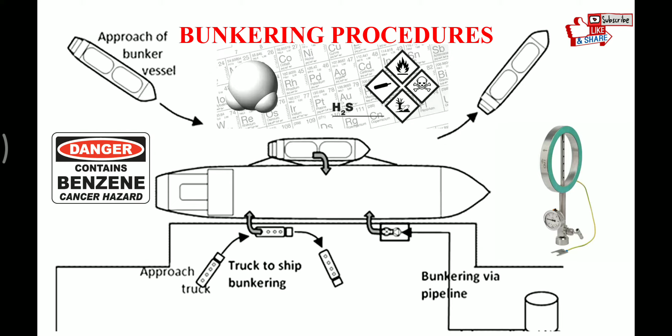So friends, in this video we'll see the procedures that we use for doing bunkering on board ship. So let's begin with this video.

So safe bunkering is a responsibility of the chief engineer, but the accountability still lies with the vessel's command, that is with the master. The fourth engineer shall receive bunkers under the direction of the chief engineer, or the chief engineer may assign a competent person to the fourth engineer to assist him. An engineer officer is required on deck, preferably at the manifold at all times, so that he can take immediate and effective action as necessary.

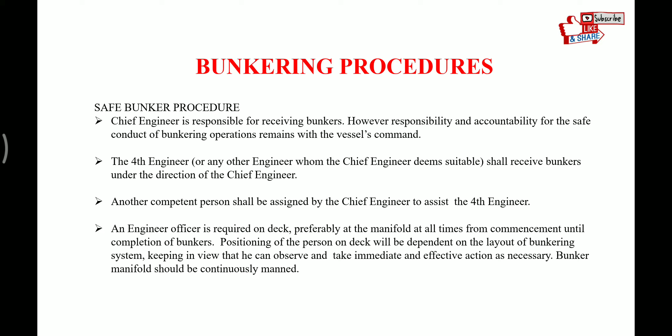The bunker manifold should be continuously manned at all times during the bunkering operation. The duty officer must check mooring conditions periodically and also maintain the watch on deck during bunkering operations. All vessels should have on board a drip sampler for drawing MARPOL samples.

All persons involved in bunkering operations should be briefed on bunkering duties at the pre-bunker meeting, which is conducted 48 hours prior to the scheduled bunkering. The oil transfer procedures and checklist are to be completed prior to, during and on completion of bunkering. The persons involved in bunkering operations should be briefed on hazards associated with hydrogen sulfide gas and benzene gas.

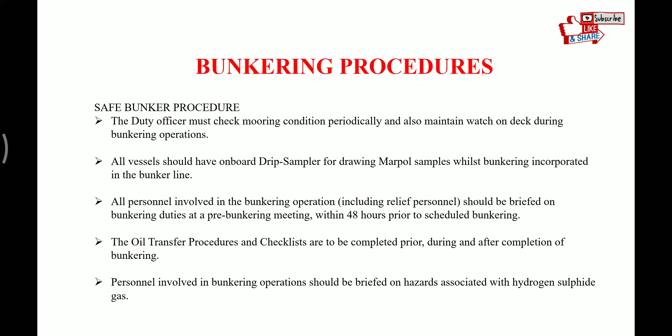So prior to bunkering we have to do some checks. So let's see what all things we have to do prior to bunkering. The bunkering checklist must be strictly complied with at all times. The engineer in charge of receiving bunkers should be fully aware of the oil transfer pumping procedures.

After the bunkering is confirmed, the fourth engineer and the chief engineer together should prepare the bunker plan and make a note of the oil quantity to be filled in each tank, and the sequence in which the tanks are to be filled.

In general, the tanks should not be filled more than 90% of their full capacity, and the last tank should not exceed 85% of the full capacity. Local regulations should also be taken into consideration, like in Japanese ports, the tank cannot be filled more than 80 to 85% of its full capacity.

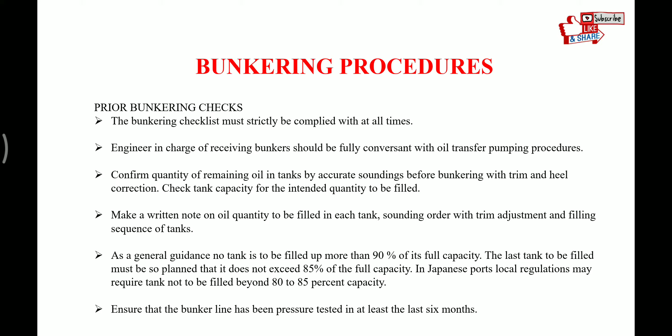Ensure that the bunker line has been pressure tested within at least the last 6 months. In general, the requirement is to pressure test the bunker line at 1.25 times the working pressure, but as per USCG, it should be pressure tested at 1.5 times the working pressure.

Prior to bunkering, all the overfill alarms of all the tanks should be tested, and special attention should be given to filling those tanks which do not have an overfill alarm. All the fuel sounding and air pipe save-alls and oil trays are to be clean, dry and plugged.

In case the fuel transfer is taking place at night, proper illumination should be provided at the manifold area, and a hand torch may be used to see overside during the bunkering operation. We have to check that all the pressure gauges are in operative condition. All the scuppers and deck openings are to be closed.

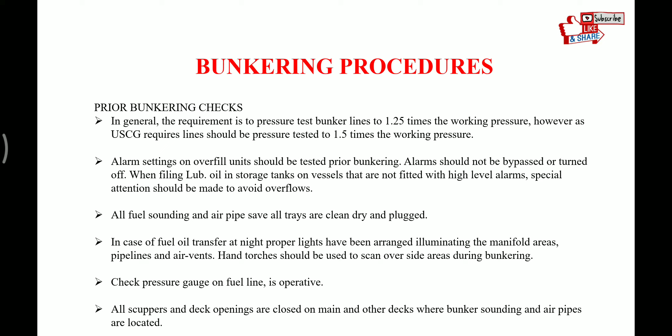Check around the vessel for any oil sheen or oil patches, and if you see any, then you have to inform the port authorities prior to commencing the bunkering operation and make a log entry for that. To avoid delay when starting the bunkering operation, we have to arrange the tools and spare gaskets at a spot near the manifold.

Then we have to bring the drip tray underneath the flange connection. We have to bring all the SOPEP equipment, mainly sawdust, cotton waste, rags, booms, oil spill dispersant, then portable fire extinguishers. Then we have to get a good sounding tape, the torch and the sounding table for taking soundings during bunkering operations.

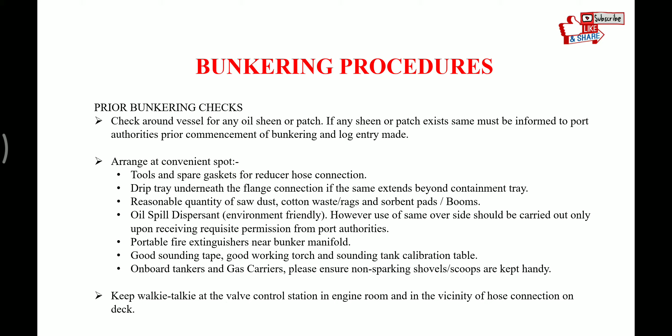On board tankers and gas carriers, we have to use things which are non-sparking. We have to rig the Wilden pump on the vent of the overflow tank and put the discharge of the Wilden pump into a 200-liter drum. Then for communication purposes, we have to keep walkie-talkies at the control stations in the engine room and in the vicinity of the hose connection on deck.

The system of communication between the engine room, vessel bunkering station and the shore pumping installation or the barge is to be tested, and the course of action for the emergency stop in the event of spills is to be understood by those who are concerned with the operation. Friends, this point is very important.

Accuracy of the gauging system should be verified by comparing the manual sounding with the gauge readings prior to and during the bunkering operation. So basically these gauges are provided for help, but we should not fully rely on them. We should take manual soundings frequently.

We have to check the supporting condition of the supplier's hose, that it is in good condition, and check the tightness of the flange connection. We can also ask the supplier for the pressure test certificate for the hose.

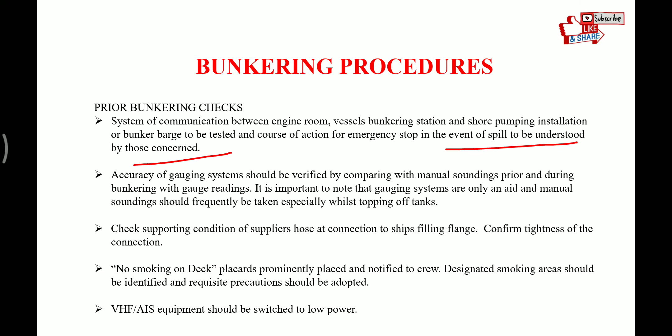No smoking on deck placards should be prominently placed and notified to the crew, and a designated smoking area should be identified, and the crew should be told that they can smoke in that designated smoking area only. VHF and AIS equipment should be switched to low power.

In case of oil transfer from a barge, we have to secure the oil barge alongside, locate the oil barge suitably, and prepare a ladder so that the fourth engineer can go down and take soundings. Check bunker manifold connections that are not in use, that is, on the other side. Suppose we are taking bunker on the port side, then we have to check that the flange connection on the starboard side is secure in place with all the bolts.

Then the deck officer will raise the B flag, and if bunkering is taking place at night, he can switch on the red lamp on the ship's mast. No welding or gas cutting operations are to be done on any part of the vessel while bunkering is in progress. Ensure all valves on the bunker line and tanks are free to operate, and quick closing valves are functional from remote locations. Sound the supplier's barge or shore tanks before commencement of the transfer. Check the temperature of the fuel tanks for any corrections to be applied.

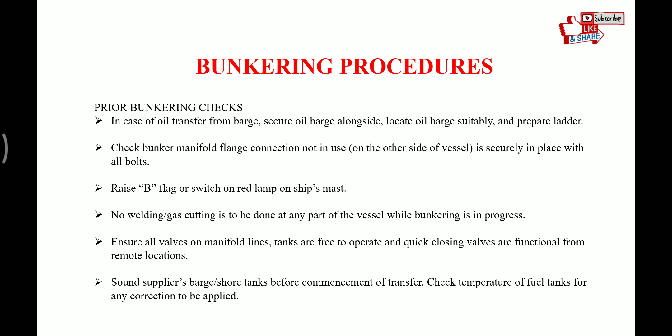The chief engineer is to agree the following with the supplier's responsible person. When the supplier's representative comes on board, the chief engineer should check the specifications of the fuel and filling temperature. Then the sequence of transfer, that is, which oil, the diesel oil or the fuel oil, he is going to transfer first. Then the loading rate for the initial startup, bulk loading and topping up should be determined and noted down in the checklist. Loading rate should be checked frequently during bunkering, and it should not exceed the rate which we have mentioned in the checklist.

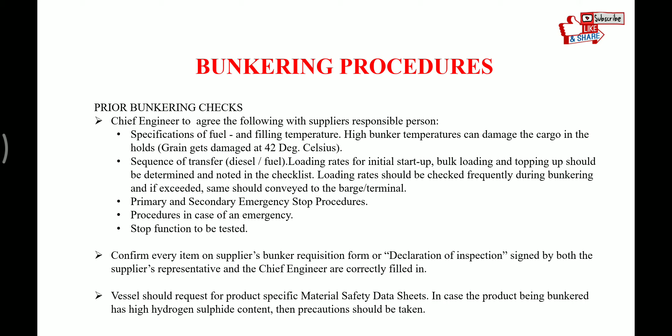Primary and secondary emergency stop procedures should be discussed. Procedure in case of emergency should be discussed with the supplier, and the stop function is to be tested prior to bunkering. Confirm every item on the supplier's bunker requisition form or the declaration of inspection signed by both the supplier and the chief engineer is correctly filled. Vessel should request the product MSDS. Any specific local regulations or harbor authorities like the USCG are complied with.

Overflow arrangement: the overflow tank will have an overflow pipe, and that pipe will have an alarm, so that alarm is to be tested, and that overflow pipe will also have a sight glass, so that sight glass is to be cleaned to check for any overflow going to the overflow tank. We have to ensure that the screw plugs in the spill trays of the fuel oil tanks in the engine room are in place and trays are empty. The automatic self-closing cocks in the engine room for the fuel oil tanks should be in good working condition and should be fully closed when not in use.

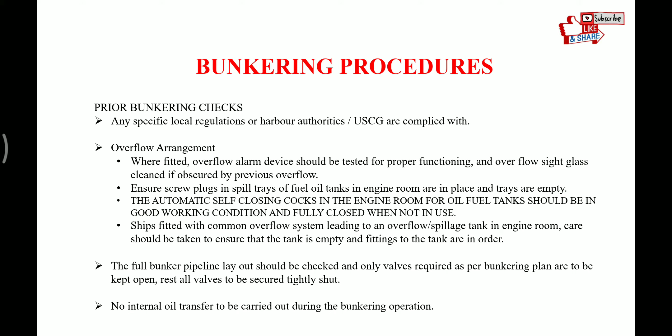On ships fitted with common overflow systems, the overflow or spill tanks in the engine room should be fully empty. The full bunker pipeline layout should be checked, and only valves that are required for the bunkering plan are to be kept open, and all other valves should be closed or shut. No internal transfer should be carried out during the bunkering operation.

Now that we have seen all the things to be done prior to bunkering, let's see what we have to do during bunkering. During bunkering operations, we have to check that all the tanks where the bunker is to be taken have their air pipes or vents open, and we have to check whether air is coming from the air vent. That will confirm that the oil is going into that particular tank.

Once the hose is connected and documentation completed, the chief engineer is to ask the responsible person from the supplier to start the bunker. At the start, we have to note down the time. The bunker will start at a slower rate. Then we have to check the hose connection and the sea surface around, that no oil is going out. We have to check that there is no leak at the bunker flange, at the pressure gauge connection or the pipeline.

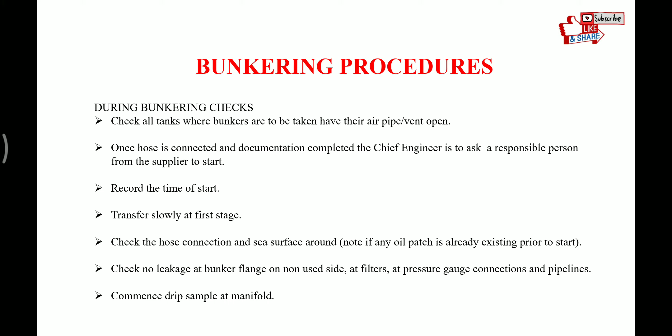Then after all the checks are done, we open the drip valve at the manifold for collecting the sample. Then after some time we have to attain the steady transfer rate and keep an eye on the line pressure, and we should not exceed the working pressure of the line.

Bunker tank sounding must be regularly monitored. The sounding interval of the tanks which are receiving bunker should not be more than 30 minutes, and the tanks which are not receiving the bunker should be sounded at intervals not exceeding 1 hour. Sounding of these tanks is also important, because if the valves are not holding, then the oil may go into these tanks and may overflow.

Adjust the filling rate and change filling tanks as planned. Filling valves of the next tank in sequence should be opened before the valves of the tanks being filled are closed. Check the completed tanks after shutting off the valve to confirm that the filling has actually stopped and no further oil is going inside. We have to maintain the vessel upright at all times.

At the final stage, we have to reduce the transfer rate. Extra care must be taken to avoid over-pressurizing the hose connection by closing too many valves against the shore pressure. As the topping up stage approaches, the flow of the tank inlet valves should be regulated and sounding monitored continuously, so that careful attention is paid to securing one tank at a time.

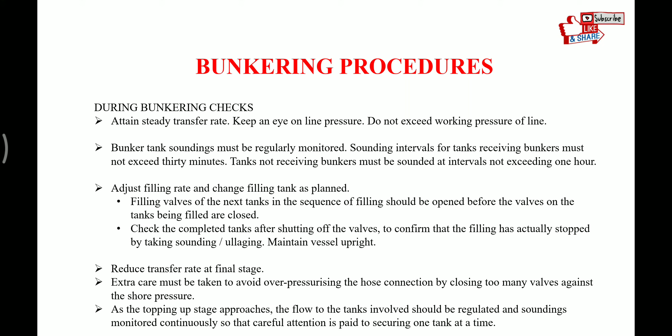Now let's see what we have to do after bunkering. Confirm when the bunker barge has stopped the bunker operation. Before the line is blown through by compressed air, ensure sufficient space remains in the tank into which the line is to be drained. The vessel's manifold valve must be fully open until the blowing is completed, and sounding pipe caps should be closed before the lines are blown.

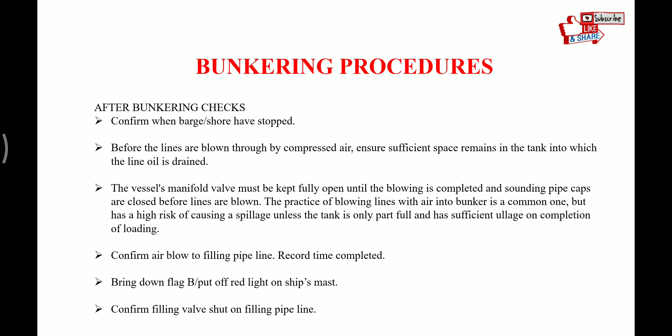Confirm air blow to filling pipelines, and after the blow through is complete, we have to record the time for the completion of the bunker. Then we have to bring down flag B or put off the red light on the ship's mast. Confirm the filling valve is shut. After that we have to take the sounding of all the tanks and confirm the quantity of the received bunker, taking into consideration the trim, list and the temperature correction.

Then we have to check the ship's tanks for any water after bunkering. Then we have to check the soundings and flow meter readings of the supplier's barge or the shore tanks, and reconfirm the quantity supplied. An empty oil tray is placed under the hose connection so that during disconnection the oil does not spill out. After the hose is disconnected, we have to put the blank flange back in place and put in all the bolts.

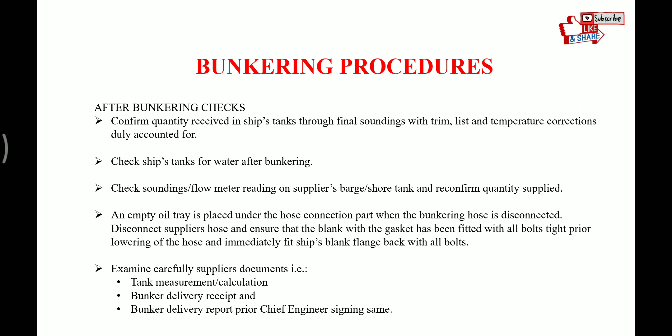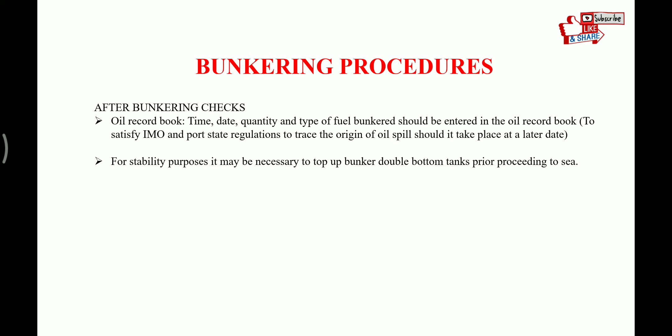After that, we have to check the tank measurements and all the calculations and check the bunker delivery note. Then we have to record this bunkering operation in the oil record book with the time, date, quantity, type of fuel bunkered and the sulfur content. For stability purposes, it may be necessary to top up bunker double bottom tanks prior to proceeding to sea. So this was the procedure that we have to follow for bunkering on board ship.